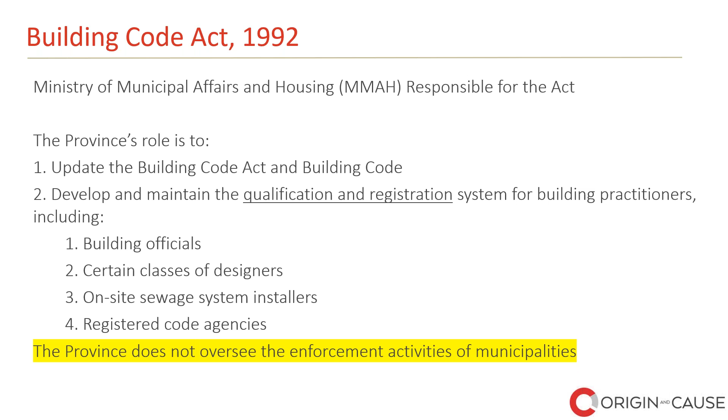So regulations provide support to the legislation and are enforceable through those acts that we just mentioned. So unlike the legislation, regulations are not made by parliaments. This is a little bit of a difference here, but rather by persons or bodies that parliament has given the authority to make them in an act, such as the governor in council or a minister. This is why regulations are developed under a separate process from those acts. So they're actually developed a little bit separate from that.

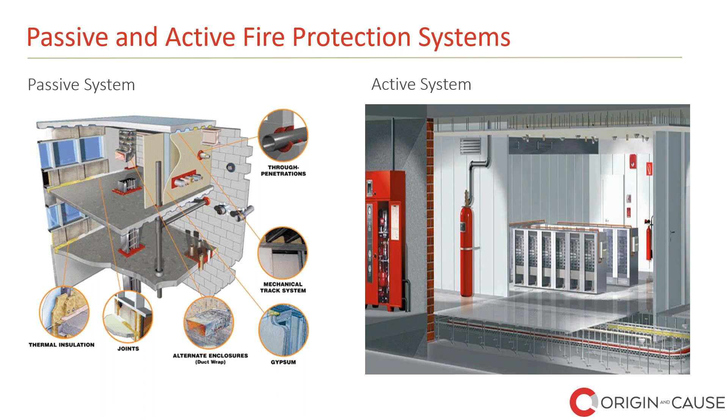What does that mean? Anything that really constitutes a system that's more or less walls or passing through, so fire stopping, which would be through those through penetrations, things like that, really come into the passive. And I'll get into that a little bit more in a few other slides. The other system that we're looking at on the right-hand side really is that clean agent system. We also have a total pack system, so we look at that as well. Those are the active systems, but again, we'll get into that a little bit more further down in the slides, okay?

So here we have passive fire protection, okay? The definition of passive really is fire protection that does not require any external power, so no external power at all, but relies instead on specific construction features. So basically passive systems are the basics of fire containment, okay? So we have to look at that containment, like a room. Without a proper passive system, a fire would not be contained and could easily spread from one area right to an adjacent area.

Okay, so that passive system helps prevent that fire from spreading from that one room and going right to an adjacent area, right? So in this case, say an exit or egress corridor that potentially has a lot of traffic flow, we don't want that spread going there, right? We want to be as safe as possible, especially when we're exiting somewhere.

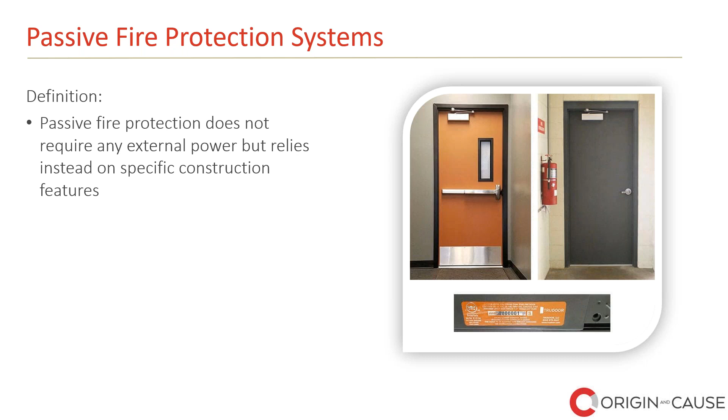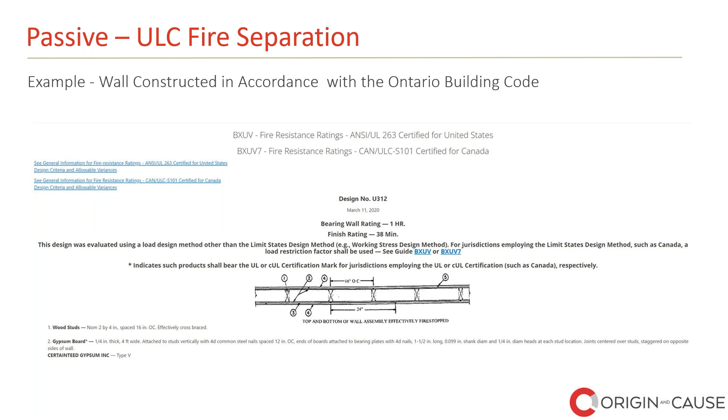Because, you know, it's not only touching it, what if they have combustible material on the other side of that wall and that's touching the wall? Well, if it gets really hot, now we have two separate fires. And how did we have two separate fires? Well, potentially then you could have a fault in your wall. And if it was supposed to be a fire separation, that wall is supposed to be tested to some standard, right? Same thing, so we look at the fire protection rating, right?

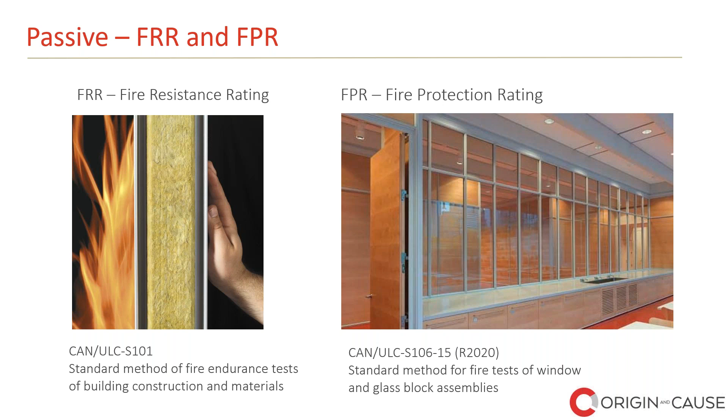So this is a little different. So we have a bunch of windows here. Well, generally a fire protection rating would just mean that it's tested to rate for that passage of flame or smoke. But if you put your hand on the other side of it, it's still going to be pretty hot, right? So that's where it becomes a fire protection rating. It's two different types of testing that they use between these different standards, okay? So really a wall is just a whole bunch of those fire protection ratings put together, tested, and there you go. There's your fire resistance rating of that fire separation.

So what does this all mean? You know, just in case you're all confused. Okay, so you can't make a hamburger without the stuff between the buns, really. So let's look at this fantastic, delicious burger, also known as a wall assembly. If we look closer at the burger, we have the buns or the walls, right? So we have the Type X drywall, the patty, the veggies, or we can call it wood studs and insulation. Put it all together and voila, there's your hamburger.

If we take that same thinking concept and think what we need for fire separation, in order to complete the package, we need something on both sides, right? Something in the middle to create that fire resistance rating. So I'll give you that example. If you take that wall on the right-hand side, for instance, if I constructed a wall and added 12.7 millimeter Type X drywall, right? We always hear the word Type X. So I'm going to use 12.7, and according to the building code, that's going to give me 25 minutes.

Perfect. So if I needed a 30-minute separation, then why not add two pieces on one side, right? That's got to be good, right? Well, that would be wrong. Because to construct a fire separation, we require all the components together to construct it properly, to not only stop that spread of fire from one area to the next, remember that heat transfer I talked about too? So we've got to look at the whole assembly, not just one face of it, okay?

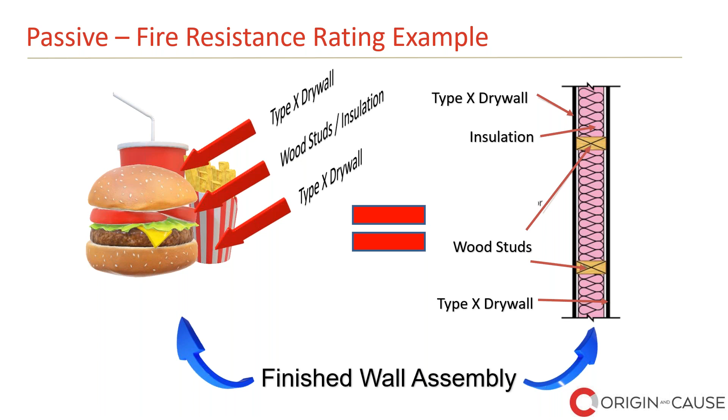So we dealt with a little bit of passive. Now let's look at these active fire protection systems. The operation of an active fire protection device requires manual, mechanical, or electrical power. For example, a sprinkler system requires sprinklers to open and a water supply at sufficient flow rate and pressure after activation to be delivered through the system. A smoke control system relies on roof vents that open or a mechanical system to operate when a fire is detected. And a detection and fire alarm system requires electrical power to operate.

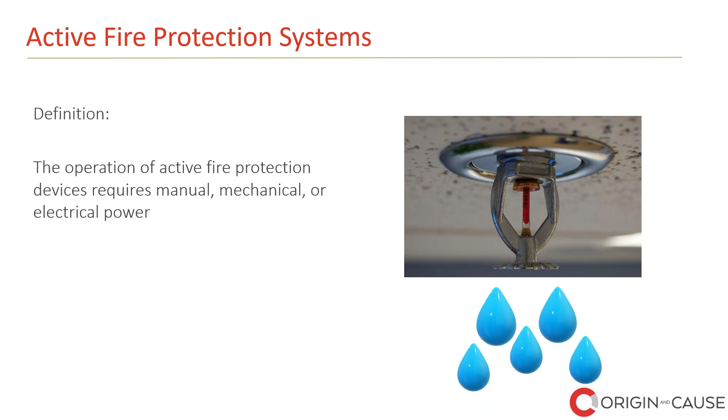So a dry system, all that means is that it doesn't have any water in the system. Typically the area it's located in doesn't have heat and is prone to freezing temperatures, for example underground or above ground parking garages. So that's where we'd see this guy here. And since we live in an area that has four seasons, it does get pretty cold. So if I had water in this in an exposed area, say a parking garage, that would freeze and then I would have a lot more problems on my hands.

Okay, a few other systems to keep in mind. There are 3 different types of these, called pre-action systems, and we have a deluge system. These are very specialized systems that you're not always going to run into, but just be aware that there are those systems out there.

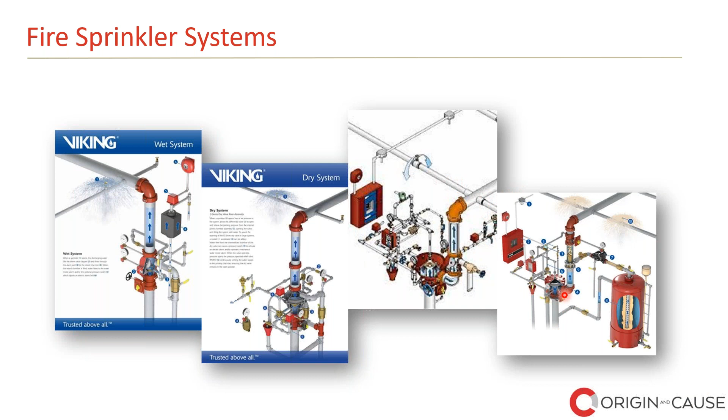But now this is where it's a little different: you've got singles and doubles. In order for this system to go off with a single interlock or a double interlock, you're going to have some type of detector go off. That detection is usually from a fire alarm, and that is going to send water into that piping network. And the system over here, that's a deluge system, and we're going to get into that right now.

So the deluge system design process. This is interesting. Keep in mind that these systems are not just thought of. The design process is very complex; there's a lot going on. A designer would have to obtain a building classification. You can't really do something unless you know what the building is. Find the hazard classification. What exactly am I protecting? What's the hazard involved here?

And then you have the relevant standards, and apply all the information in the standard as applicable to that specific hazard. Sometimes a hazard such as a hangar is identified not only in NFPA 13, but it also directs you to NFPA 409. 409 is the standard for aircraft hangars, which we can see on the screen right here. And don't forget about regulatory bodies.

This is another thing too: we seem to always want to design everything, oh, there's a standard for it, perfect. But we also have in this country and others as well regulatory bodies such as Transport Canada in this case, or even the Canadian Forces Fire Marshal for that matter. They have certain designations, requirements, and standards that you have to meet that may require specific requirements at or above the actual standard itself.

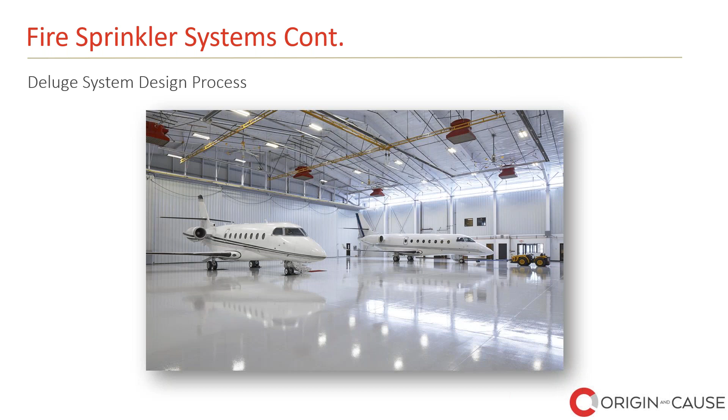I know I may have lost a lot of you here, and that's okay. I'm going to show you a couple of videos on how these things operate, some pretty cool videos to actually see what they look like. Just to let you know, they might be a little bit loud. If it is too loud, feel free to turn down your volume or mute it. It's up to you. I would suggest keeping the volume on because it has some background information that may be valuable, okay?

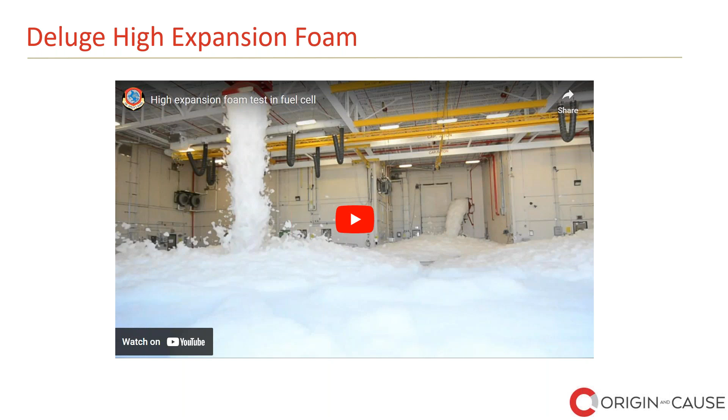So just because you walk into somewhere, you have to realize, what kind of system am I actually getting into? What actually went on here? Do I have a lot of fire spread? Do I not have a lot of fire spread? What's in here? What's being protected? How is it being protected, right? So this is a little example of how a clean agent system operates.

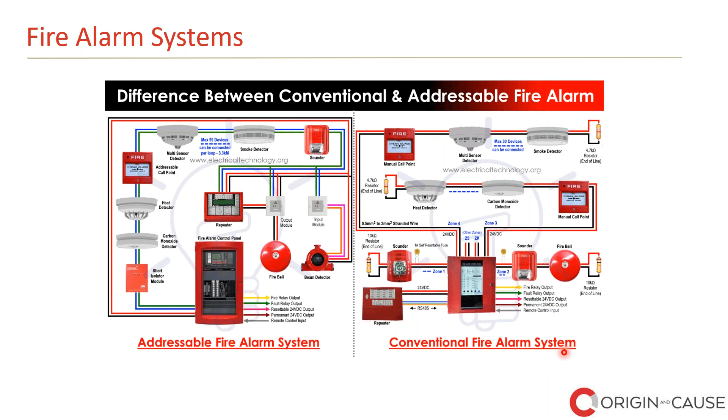Okay, now fixed fire protection systems. This is kind of the last active system I'll get into today. So fixed fire protection systems, we're typically around a lot, but pay very little or no attention to. You see a lot of these around restaurant cooking operations. So anything that contributes to grease-laden vapors may or will require a fixed fire suppression system. Okay, so it depends. Currently the systems that are listed, we have wet chemical systems. Those are the ones that are actually listed for these restaurant systems.

So for new systems, we would use the Ontario Building Code. So part 6 of the Ontario Building Code is 6.2.2.6, so that's the article. And then this article would direct you to NFPA 96. All that means is that's a standard for these systems, the standard for ventilation control and fire protection of commercial cooking operations. And that's going to lead me into other things like NFPA 17A, for instance, for these wet systems that I was talking about, right? But that's the standard that it would bring me to, okay?

So for existing commercial cooking operations, we would use the Ontario Fire Code. Remember I talked about new, now we talk about existing. So how does that work? We would actually use a fire code. So in this case, the Ontario base would be Article 2.6.1.12, and I know the national also has stuff built out in it as well, and everywhere else, because they really adopt that national model code, and it's the same thing. So it's going to tell you to go to 96.

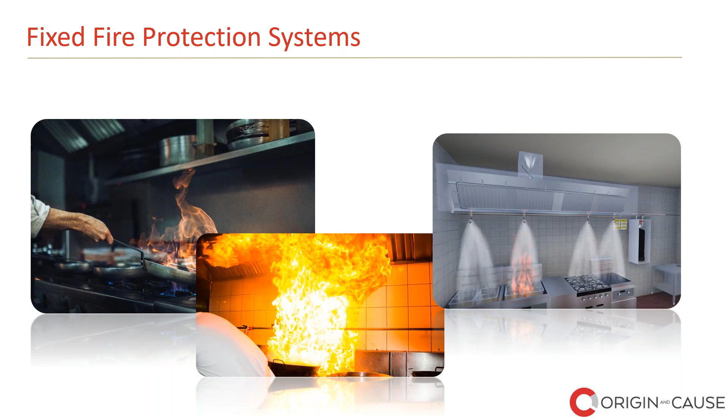So now we're going to get on to how they are applied to a claim. I'm sure that's what everybody's thinking: oh, okay, great, there's a lot of information. Where's the relevance, right? How does this apply to me? Also note there are many other fire protection systems that we did not focus on because of our limited time, okay? So the systems that we focused on are the fundamentals of what we are more than likely to encounter in the industry. And how can we apply the code to help our claim scenario?

Okay, so here we have a case study. This here is for an industrial building, so building classification F2. If we're looking at an F2 major occupancy, all that means is that it's a medium industrial occupancy. Typically, it has more than approximately 50 kilograms per meter squared of combustible material. That's the building code definition of what they consider an F2. So yes, there's some calculation that goes into these.

This F2 building has multiple tenanted spaces used as repair shops, also known as mechanic shops. For the purpose of disclosure, for this particular case, we will refer to bays 1 and 2 as tenant 1, and bays 3, 4, 5 as tenant 2. Other bays, of course, were affected, but did not play a pivotal role in the fire spread.

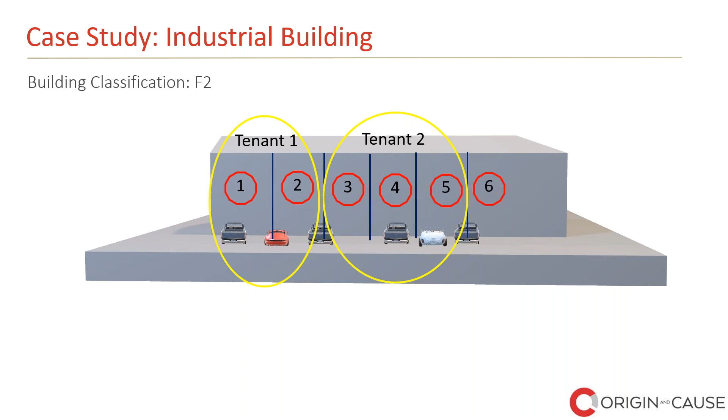Upon examination, the fire investigator discovered that tenant 1 and 2 were separated by a wall constructed of plywood. This is where I'm getting involved in the mix. The pre-fire photo depicts a combustible wood wall that separated tenant 1 and 2. The post-fire depicts an open area void of any wall. So if we look at the post-fire, where did the wall go? We have it here, but it's not here.

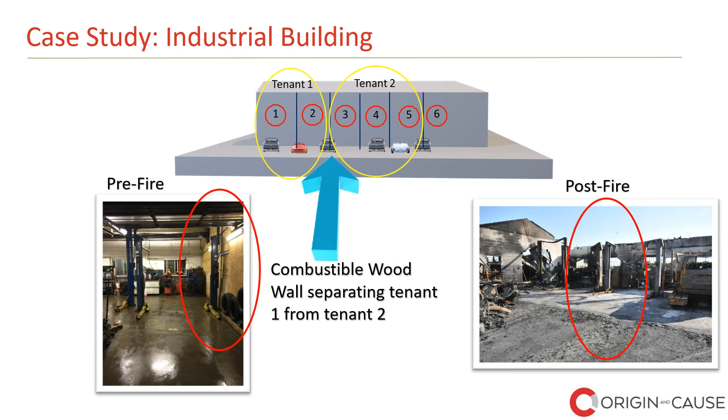The wood wall was constructed to separate both the tenanted spaces, tenant 1 and tenant 2. That's why they put that wood wall in. So here we go, we have a wood wall. What act and regulation would we use to address this? Let's break down which one we would use.

For instance, we have the building code. The Ontario Building Code has set a minimum standard for the design and construction of new buildings, for additions, alterations, and change of use of existing buildings in the province of Ontario. Or the fire code. The fire code applies across Ontario and consists of a set of minimum requirements for fire safety within and around existing buildings and facilities.

Obviously this case study is about existing buildings, but the wall was an addition. So because it was an existing building, but the wall was an addition, the winner would actually be the Ontario Building Code, because it wasn't there originally. It was an addition put into the existing building. So that's where we would use the building code rather than just open up the fire code, because it was never there to begin with in the original design.

So here we have passive fire protection, fire separations. Earlier we discussed passive fire protection systems, and in this case study we look at the fire separations. I have 2 suites, and suite is defined in the building code as a single room or series of rooms of complementary use, operated under a single tenancy. A tenancy in the context of the term suite applies to both rental and ownership. The 2 suites prior to the fire are separated by a combustible wall.

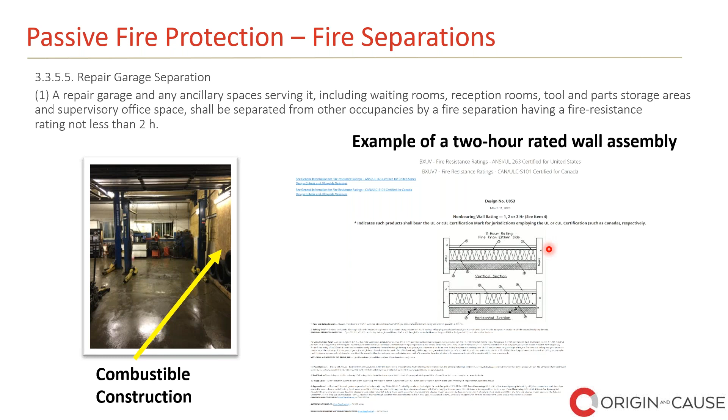If I examine the code, I come across this article, 3.3.5.5, repair garage separations. If we read through it, it tells me it needs to be separated from all other occupancies by a fire separation having a fire resistance rating of not less than 2 hours. If I compare it to this example, a 2-hour rated wall assembly doesn't really look much like this now, does it? Again, this is only an example; there are other 2-hour rated wall assemblies, but it doesn't appear that we have the 2-hour rating that we should have.

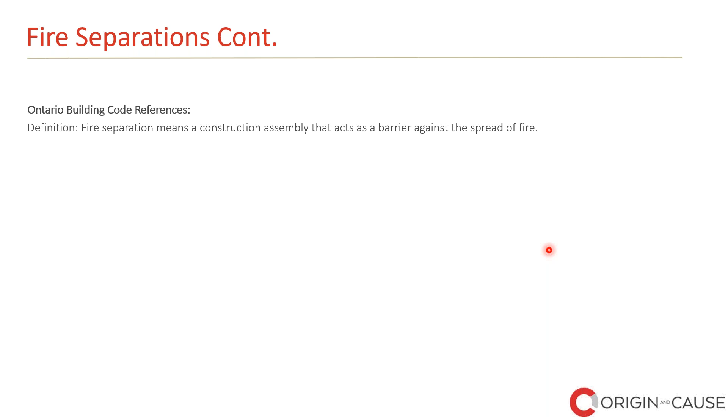So how do we get to this point? First, we would have to dive into the Ontario Building Code. So what exactly is a fire separation? Fire separation means a construction assembly that acts as a barrier against the spread of fire. And the second part of it is that fire resistance ratings are required as part of the assembly.

So Article 3.1.7.1 is what we're seeing here; sentences 1 and 2 are the prescribed requirements as per the building code. Remember that listing, I showed some pictures of what an actual fire resistance rated listed wall looks like. So that's ULC S101, in sentence 1. And the second one talks about an assembly of materials or structural member.

So we talk about the supplementary standard SB-2, which comes right out of the building code. So we have an option of this listed requirement, or an option of that supplementary standard. One thing to note: say they told me we designed this to SB-2. Well, there are limitations as to when you can use this compared to having something tested.

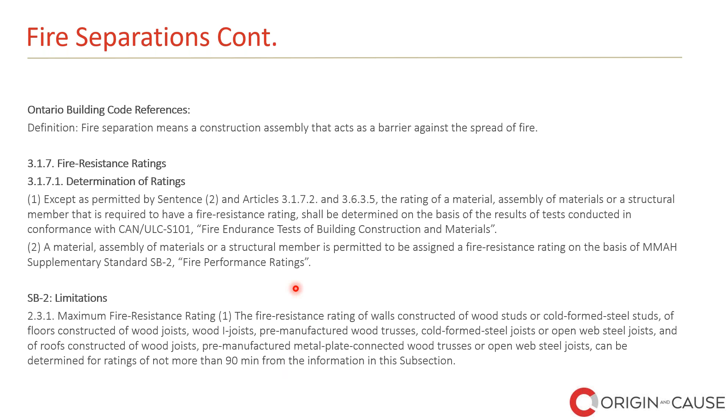So the maximum fire resistance rating: if we read through this, we see the walls, the cold-formed steel studs, floors, wood joists, all that stuff. But as we keep reading, we come to not more than 90 minutes from the information in this subsection. So that becomes a problem. Two hours, 90 minutes, that's not adding up at all. We only have an hour and a half max. So now we're jumping into more of a listed system.

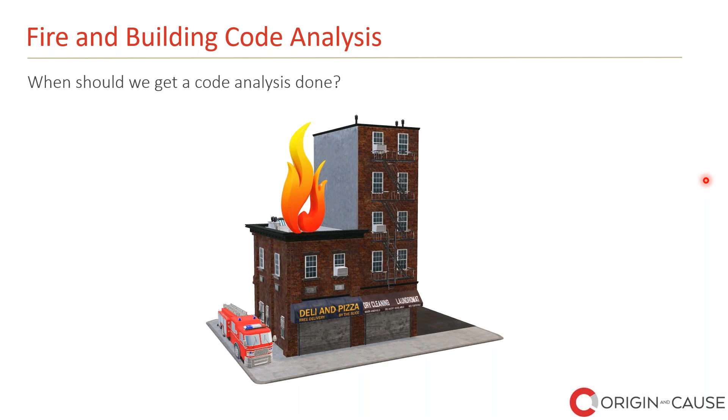So that requirement would say we're going to need a fire separation and a listed system for that case study. So when should we get a code analysis done? Really, any time a fire occurs and an active or passive fire protection system appears to have failed. That's when you go, something doesn't seem right, I need to look into this further.

And a big question everybody has is who's responsible for code compliance? Let's look at these responsible parties: owners, general contractors, developers, contractors, property managers, tenants, landlords, etc. So there's a lot of different parties it could come to. Let's break this down: responsible person and/or corporation.

For owners, unless otherwise specified, the owner is responsible for carrying out the provisions of this code, that's the fire code. And the building code talks about permits, because the building code is more or less new construction. These permits say the owner includes, in respect of the property on which construction or demolition will take place, the registered owner, a lessee, and a mortgagee in possession.

So let's look at contractors and property managers. How would they fit into this? In the fire code, owner means any person, firm, or corporation having control over any portion of the building or property under consideration, including the persons in the building or property. So it's more opened up. Property managers, or a contractor that had care and control over the system they were using: were they the owners by definition of that system at that time?